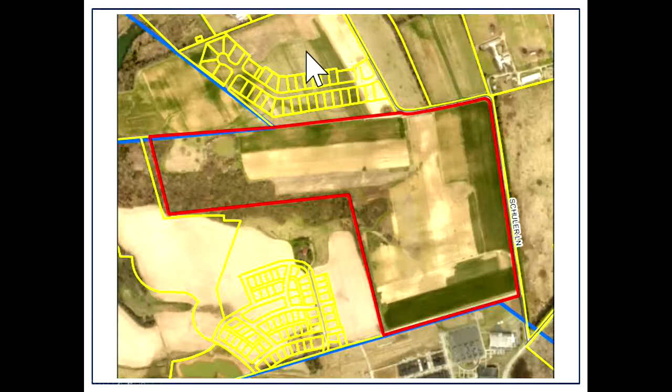This is a zoning map that shows the existing zoning is AG1. To the west is PUD, this is Norton Commons. Again, to the north, R2 is Sanctuary Falls Phase 1, and then to the northeast and east is AG1.

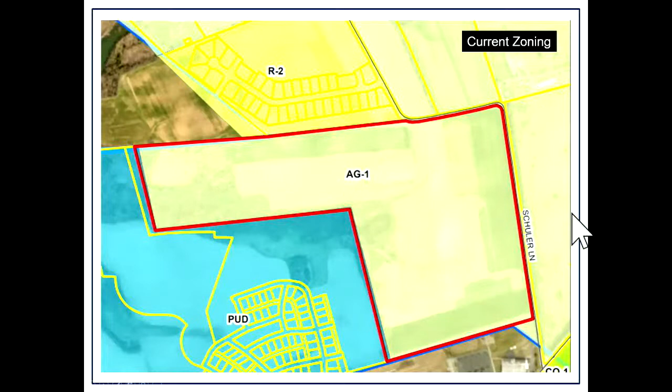The Oldham County Future Land Use Map predicts that the intended use of this property would be for single-family residential.

Site history: on December 19th, 2019, Oldham County Planning Commission recommended approval of a zoning change from AG1 agricultural to R2 residential to Oldham County Fiscal Court. Fiscal Court approved that zoning change on February 18th of 2020.

On December 19th of 2019, the Planning Commission also approved a preliminary subdivision plan for 58 lots on approximately 34 acres. This is the case history.

This originally started back in July of '21 with the neighborhood meeting, followed through with technical review committee, and then we had deferrals from the Planning Commission.

This just shows the postings of the signs, neighborhood meeting notices, adjoining property owner notices, as well as the most recent ones, the APO notices that were mailed on May 5th, as well as the public notice in the Oldham Era.

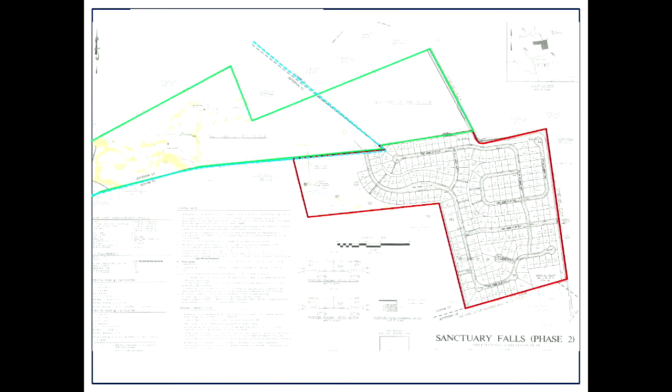Again, the applicant is proposing a zoning change, a zoning map amendment, and preliminary subdivision plan comprised of 187 lots on approximately 109.4 acres to be known as Sanctuary Falls Phase 2. You'll see outlined in red the subject area of the zoning change. This is just a zoomed in version of this proposed subdivision plan and shows the connectivity into Phase 1.

Under notes, R2 allows a maximum density of 3.63 dwelling units per acre with a minimum lot size of 12,000 square feet and a minimum lot width of 80 feet. Open space is not required in the R2 zoning. The proposed density is 1.71 dwelling units per acre and meets the minimum lot width and minimum lot size requirements. The plan also reflects 24.7 acres of open space.

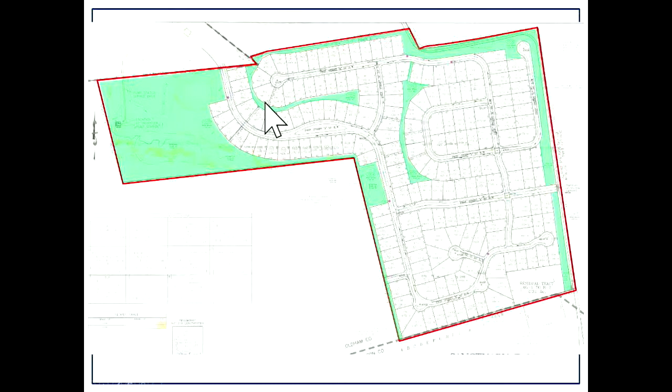Highlighted here in green is all the open space in the development. The plan also outlines a signature entrance similar to Phase 1, an 8-foot mixed-use path along Schuler Lane, as well as a 50-foot landscape buffer along Schuler Lane. This is Schuler Lane here to your east and north. The highlighted in green is the 50-foot landscape buffer, and in pink or purple is the 8-foot mixed use path. They do have a temporary construction entrance here that will also be their signature entrance, similar to what you had seen in Phase 1.

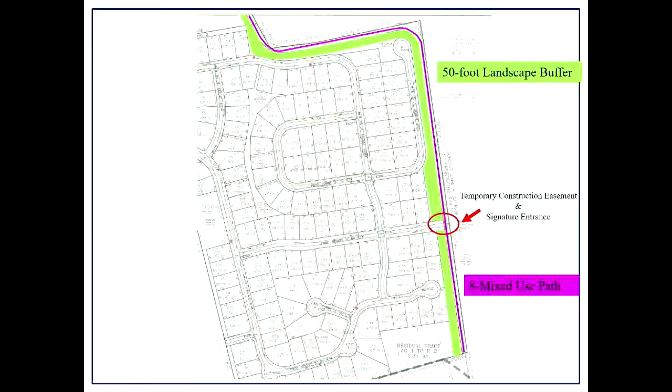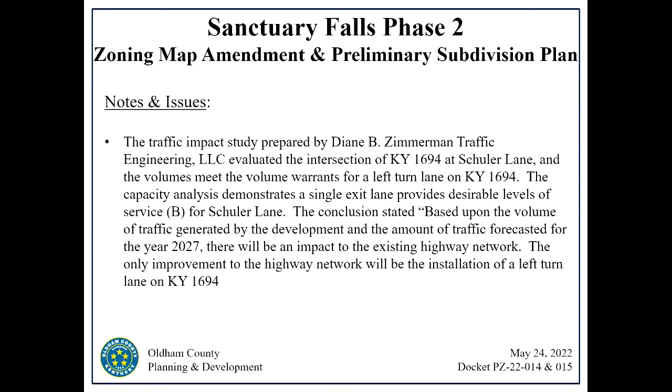A traffic impact study was prepared by Diane B. Zimmerman Traffic Engineering, LLC, and evaluated the intersection of Kentucky 1694 at Schuler Lane, and the volumes meet the warrants for a left turn lane on Kentucky 1694. The capacity analysis demonstrates a single exit lane provides desirable level of service B for Schuler Lane. The conclusion stated, quote, based upon the volume of traffic generated by the development and the amount of traffic forecasted for the year 2027, there will be an impact to the existing highway network. The only improvement to the highway network will be the installation of a left turn lane on Kentucky 1694.

In your packets, they also provided the Kentucky 1694 and Schuler Lane roadway improvement and drainage improvements plan. It outlines a left turn lane from Kentucky 1694 at Schuler Lane. No turn lanes are proposed on Schuler Lane at 1694. This is the roadway plan that you'll see. There is the left turn lane here at the bottom left corner, and then there is the proposed double yellow solid line here.

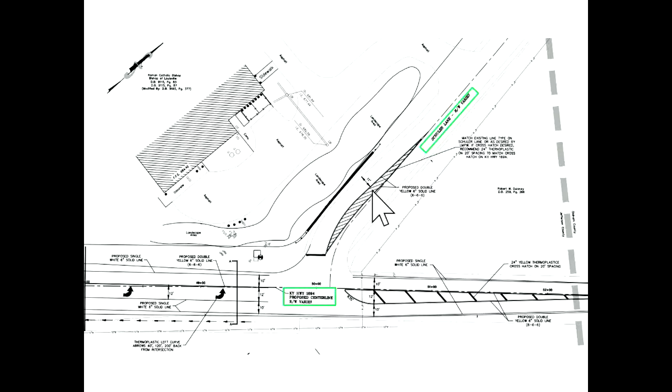The prior binding element for Phase 1 requiring two $125,000 bonds for future traffic control devices at Highway 1694 and Worthington Lane, and Highway 1694 at Stone School Road, have been received by KYTC, and courtesy copies were provided to staff. These are just copies of the two bonds that were posted as required from the previous approval.

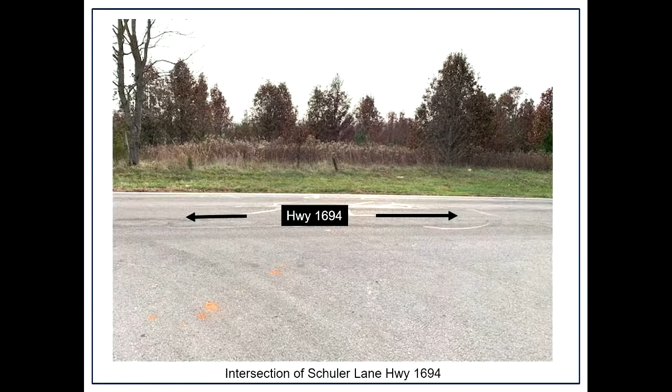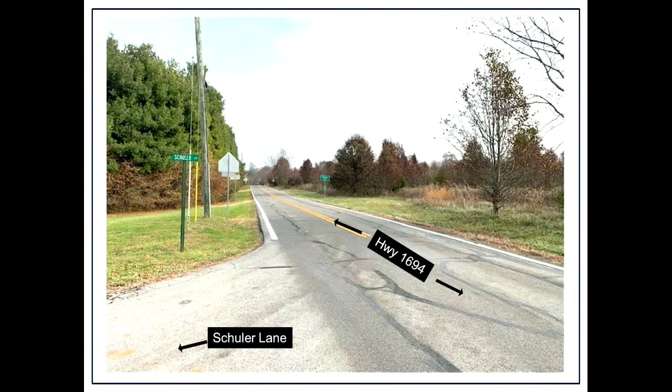This is the intersection of Highway 1694 and Schuler Lane. This is traveling north on Schuler Lane. This is looking into the site. This is just to give you a bearing here. This is the first curve at Schuler Lane. This is Sanctuary Falls Phase 1. You'll see it's already under construction, and this is the beginning of the signature entrance.

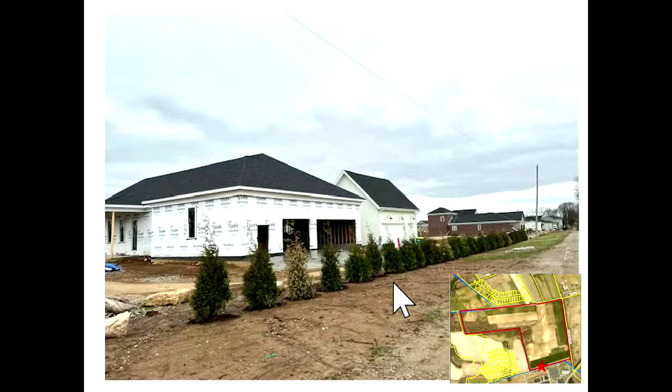This is the east adjoining property, so this is across the street. This is traveling south down Schuler Lane towards Highway 1694. Again, this is your subject site here. Then this is traveling the access road that runs along the subject property and Norton Commons property and the church. So this just gives you a view going down that lane. These are homes in Norton Commons.

Binding elements are the same as before with the exception of the removal of the requirements for the bonds and the roadway improvement plan, which was provided previously. Binding element 1 says approval applies only to the plan presented at the May 24th, 2022 Oldham County Planning Commission public hearing. No lot shall have backyards facing Schuler Lane. The applicant shall submit a landscape plan for approval by planning staff. Prior to recording of the record plat, a 4-board black horse fence shall be built and maintained along Schuler Lane. Before any permit is requested, the developer shall work with Louisville Metro Emergency Service and Oldham County Emergency Management to prevent any issues regarding emergency services dispatch and response, including CAD.

There shall be no exterior construction activity on projects or deliveries to sites between the hours of 8 p.m. and 7 a.m. on weekdays, and 4 p.m. and 9 a.m. on weekends. There shall be no trash or construction debris removal between the hours of 6 p.m. and 8 a.m. I'm not going to read all of the lighting, but this is the exact same lighting standards that were from Phase 1.

Number 9: there should be no subdivision of any lots into a greater number of lots without review by the Oldham County Planning Commission. The cumulative phasing plan shall limit the number of dwelling units to 35 per year, beginning with the first record plat. The preliminary plan must comply with all established federal, state, and county ordinances and requirements at the time of construction plan approval.

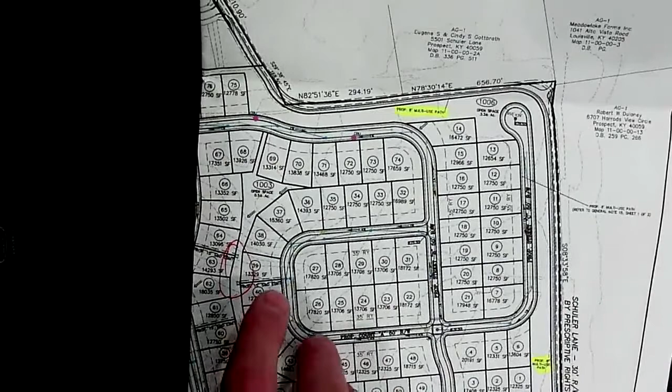Thank you. During construction plan submittal, we want to look at this stormwater connection. It's behind, we'll say it's behind lot 39 and 40, where the stormwater flow from these two pipes creates some acute angles and surface flow. I'm not sure that it's going to stay in the ditch, so we recommend, or would like to see, that piped with catch basins just to eliminate erosion on the adjoining properties.

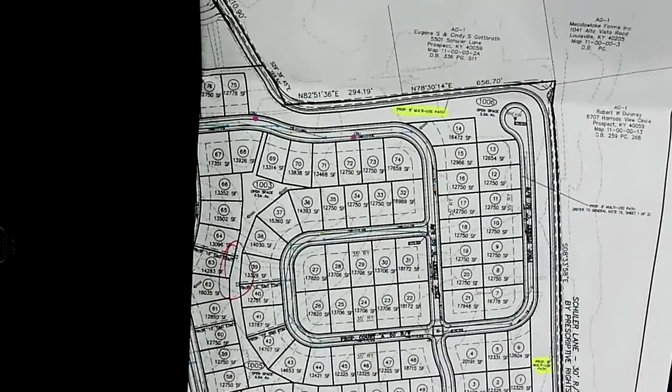With regard to other plan review, the plans shall be designed in accordance with AASHTO, the policy on geometric design of highways and streets, and they can utilize the supplemental low volume roads design guidelines, as we've discussed with engineers in the past, and also the Oldham County subdivision regulations.

We did receive the updated traffic study for phase 2 of the development, which was revised on April 5th, 2022, subsequent to comments from my office, and also 3 supplemental memos, 2 of which addressed some specifics on 2 intersections. We understand that many of the intersections addressed, or really all the intersections addressed in the traffic study, are outside Oldham County - they're either under the Kentucky Transportation Cabinet or Metro Louisville government jurisdiction.

So I contacted both agencies to ensure concurrence from their review. We did receive the permit from KYTC regarding the left turn lane that Amy detailed in her report, and also concurrence from Metro government on the improvements as planned and shown in this development plan. Okay, all right, thank you, sir.

With that, commissioners, do you have any questions for staff at this point? Any questions for the staff?

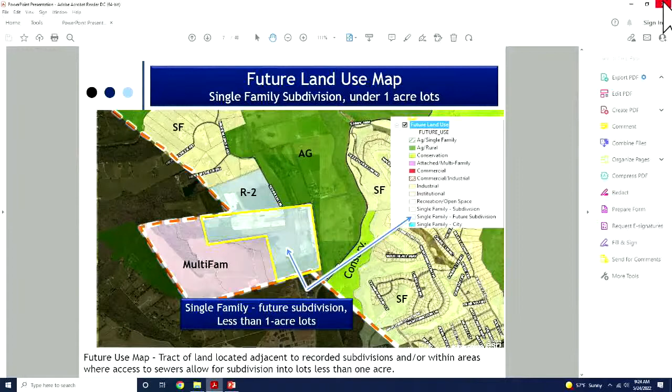As you may recall, some of you were here in 2019 - Elite went well beyond their duties and obligations in providing all sorts of improvements that we'll detail, and they're continuing with that today, well beyond what should be required.

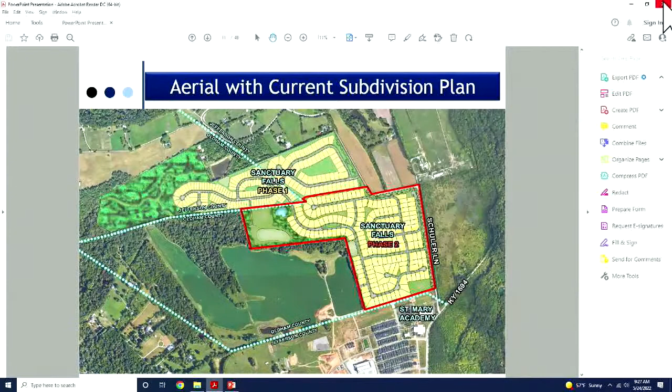It shows our new plan superimposed next to phase 1. This is the plan that we showed in July 2021. What I want to point out as I flip to the next one - you probably can't recognize the changes because they're very subtle. In a second, I'm going to go through and show you exactly what was changed between those two.

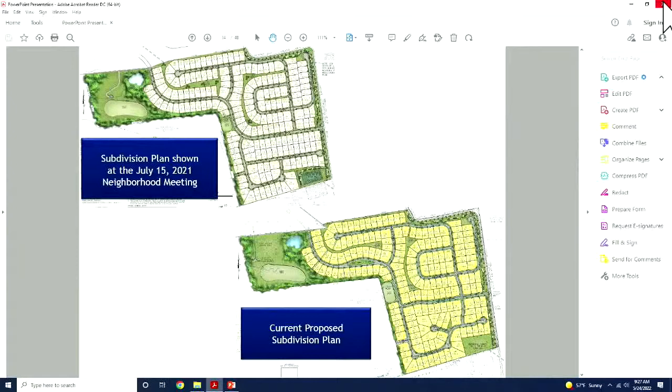And here is our current development plan. I'm going to start at the top right. You can see an open space was relocated - there was a very small sliver of open space between the backs of those homes that's been relocated.

Moving down to the bottom right, we've got a slightly revised lot configuration with our cul-de-sacs. Also, moving clockwise, we've got a revised roadway system. And then moving back to the top left, you can see a grass median was provided - that was absent, that was not part of the plan that was shown in July 2021.

Now, the little box to the left shows really the biggest points. The lot count in the prior plan was 190. With the changes to our road network and the open space configuration, we dropped down to 187 - so we lost 3 lots. The open space remained effectively the same, going from 25.3 to 24.7.

A couple things I'd also like to point out about this plan. On the right, you can see the enhanced landscape buffer and the 50-foot buffer that is along Schuler Lane. You can also see this is the area that will have the 8-foot multi-use path. That was part of what we did in phase 1, and we'll continue that all the way down Schuler Lane.

The last thing you'll notice to the bottom right, you'll see a little green square. That's about 2.5 acres of land that we have dedicated and agreed to provide to St. Mary's for them to use as a play field for their school. That's been a gift from Elite Homes to the school for that purpose. You can also see some of the drainage. We'll have land design and development available to answer any specific questions you all may have about that.

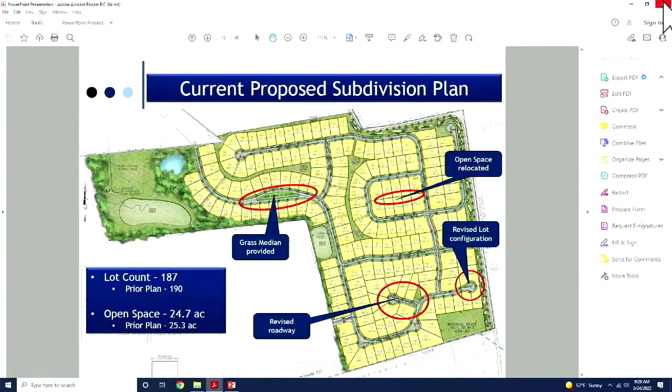Lastly, the housing design standards. Again, we'll have some elevations, and Mr. Pusateri will come up and talk to you about that in detail.

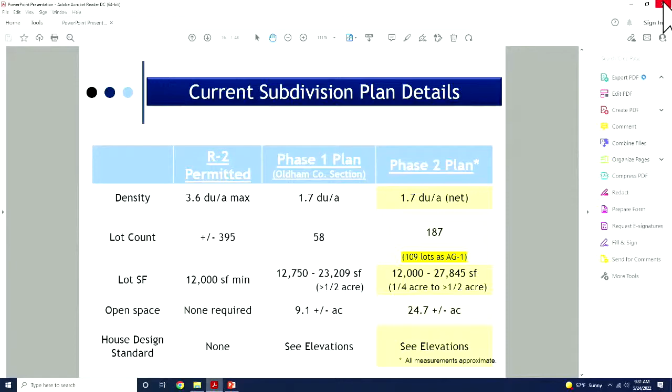One of the things I wanted to raise, because I think it's an important point, under AG1 you're allowed to have residential homes. They just have to be on an acre lot, and they don't have to be on sewers. With the property that we have, by right, you could put 109 lots on this property conceivably. Obviously when you actually plan it, maybe it would be slightly less, but conceivably you could have 109 lots. With our plan, we're only asking for 187. So really not a significant increase, particularly when you consider the conditions and the things that Elite Homes has been contributing to the road network and the conditions that they're doing on this plan, all to satisfy the needed homes that are in Oldham County.

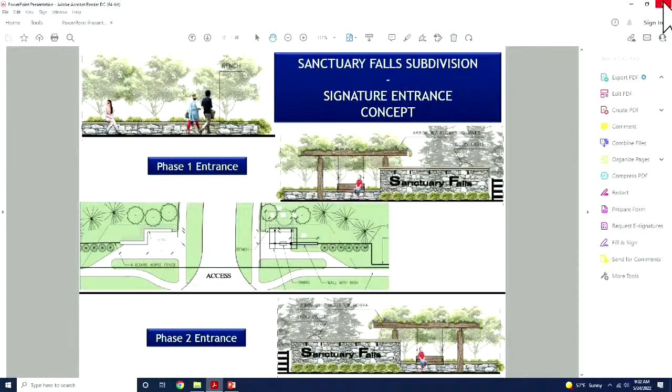This shows our signature entrance. Amy mentioned our entrance - the top one is phase 1, that's currently being built. Phase 2 will be effectively a mirror image of what you have in phase 1. So you'll have 2 bookends. It'll be a very coordinated development and very nice when you drive up Schuler Lane to look at the entrance.

I also wanted to talk about some of our commitments for Schuler Lane improvements. If I could back up, as Ms. Albee mentioned, we agreed to a lot of commitments in phase 1 that we continue to agree to in phase 2. For instance, we agreed to widen Schuler Lane to 22 feet, which was beyond what we needed to do, and we worked with the county in doing so. We agreed to the 8-foot multi-use path, the enhanced landscaping, the 4-board horse fence. We also agreed to 2 bonds for traffic lights at intersections in Jefferson County to assist the traffic issues that are in this area.

One of the things we did is we also agreed at the phase 1 hearing to put a left turn lane in from Schuler Lane onto 1694. And if you look in these plans, if you wrote any notes, there's lots of notes about left turn lanes. So let me give you a little background to make sure we're not getting confused.

The left turn lane that Amy spoke about today, and that we are doing, is the left turn lane from 1694 into Schuler Lane. That is still on the plan and we're still doing it, and it's necessary because of the traffic counts and so forth.

What we had also agreed to do, along with everything we agreed to in phase 1 — I think you can agree we were in a very agreeable mood and agreed to just about everything — a couple of residents asked if we could put a left turn lane

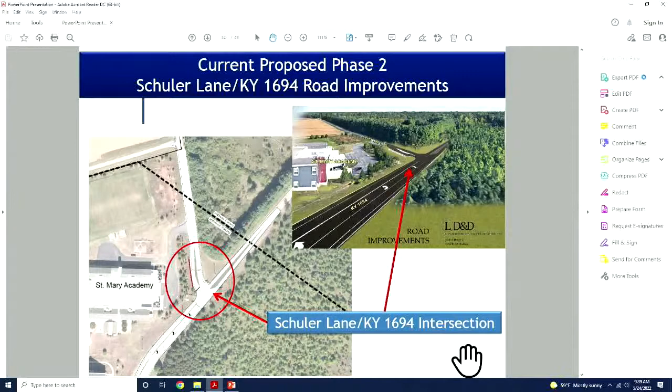So we wanted to do it, and in good faith, we have done everything we can to try to do it. Unfortunately, Norton Commons has a homeowners association. It's my understanding they have not given us the authority to have that additional right-of-way, and they hold ultimate control. It's for reasons unbeknownst to us, but they have not given us that additional right-of-way. Additionally, KYTC and Jefferson County have indicated they don't want the left turn lane. So we've got really two things running against us on that. But again, hopefully you understand and see that it is not necessary.

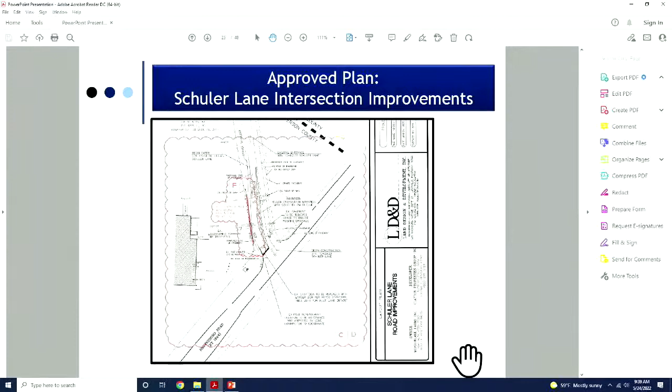Here is our current plan. You can see the crosshatched area, hopefully it shows up a little better than the screen I'm looking at. Again, that is because you can see it's kind of a sharp turn. When you take a right turn for the buses coming down, that's where we're providing that additional radius. And so that's what we're doing, and that's our current plan. The slide shows that it's been approved both by Jefferson County and KYTC, and I believe that also was confirmed by Mr. Silliman. But we have received approval for the current plan as it is today that I've shown.

The next thing I wanted to talk about is the traffic lights. Again, this is for two intersections that are in Jefferson County, not Oldham County. We mentioned the two bonds for traffic lights, and they were $125,000 each, so a total of $250,000 that Elite Homes agreed to do for bonds for traffic lights at Stone School Road and the Worthington Lane intersection at 1694.

With the traffic light, however, with the bonding we provided in phase one, that level of service improves not only over what it would be after build, but over what it is currently if we don't build one single house on this property. It drops to a B at 14.5 seconds.

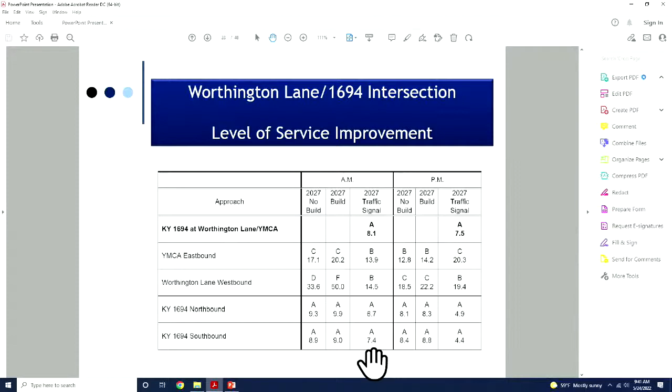The other thing I'd point out is, with no build, all of the intersections are different - you've got C's, D's, and a couple A's that aren't really problematic, B's and C's. But if you compare that to the level of service with the traffic light, all either remain the same or improve in level of service. I believe all actually improve in terms of seconds of wait.

This is the second intersection I mentioned, at Stone School Road. Very similar situation - the only problematic movement is Stone School Road westbound. That is currently an F, so it's in bad condition already, with a wait of 198 seconds in the morning. With the build, it's still bad, still an F at 295 seconds. With the traffic light, however, which has been bonded, it improves significantly from the no-build situation to 26.3 seconds, level of service C.

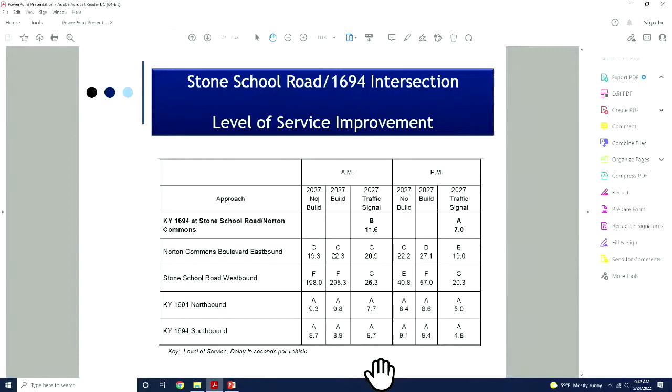You can see a similar fashion in the PM. Without the build, it's an E at 40.8 seconds. With the build, it's 57 seconds, an F. So slight worsening with the build, but with the traffic light, it improves significantly to 20.3 seconds. Again, if you look at all the levels of service with the traffic light, both afternoon and morning, you can see they all improve over the current no-build situation.

Another reason we think this development is appropriate for Oldham County is that it's going to contribute significant tax money to your county. You can see on Sanctuary Falls, we've got our average sales price to date, and these are sale prices from phase one that we currently have, $686,000. Believe it or not, that number has actually gone up since we put those figures in, and I would anticipate by the time we start coming out of the ground with phase two, that price would probably be higher, but we try to be conservative.

The total value created would be $128 million on those 187 lots. And that would contribute $1.658 million. You can see at the bottom in total taxes. A few things, all of them are important, but a few I wanted to point out and I've highlighted.

The school will get directly $738,000 and change. The school building fund will get another $287,000. And the fire department will get $205,000. Significant amount of money that this development will be contributing to your Oldham County. And one thing I didn't highlight is directly to the county, up top, is $111,000. These will all be yearly benefits. This is not a one-time benefit. These are going to be monies that are paid into your county on a yearly basis.

Here I had some binding elements, and Amy really did a detailed job going through them. So I'm going to be very brief, but no rear yards. The four-board horse fence will be done. No additional utility or street lights. We'll have the 8-foot multi-use path.

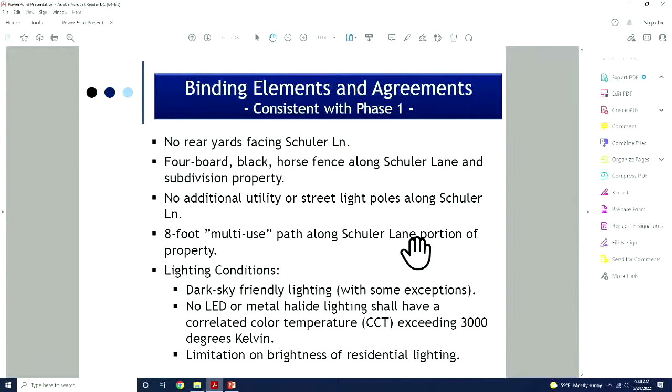Significant lighting conditions. These were very important to the people in Hidden Creek when we came to phase one. I don't believe there's going to be anybody in opposition on those lights. That was something we agreed to do and we continue to do to this day.

At this point, we've got our slides that are going to show our home renderings, and I'd like to introduce Joe Pusateri. He's the founder of Elite Homes, to come take you through and talk about some of the homes. Thank you very much.

My name is Joe Pusateri. I live at 18401 Bridgemore Lane, Louisville, Kentucky, 40245. Before I go over the elevations, I just want to tell you a little bit more about our company. This is our 46th year in business. Very first house I built was in Barwick Farms on Pin Oak Drive. Next home I built was on Winters Lane.

Our company is probably best known for the home we built for the Extreme Makeover Home Edition TV show in 2008 for a young man that was blind and in a wheelchair. It's in the U of L marching band. His father pushed him in formation. His name was Patrick Henry Hughes. And it was big news in Louisville in 2008.

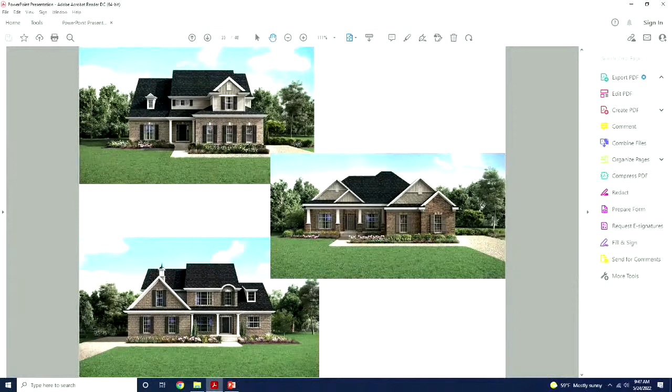Here are some of the houses, some of the front elevations of the houses that we would build. If you look at them, you'll see that they all are predominantly brick and stone with some siding accents. They all will have full basements. They will all have a minimum of 2-car garages. The garages will all be side entry. In homes like this, when you're in the $700,000 price range, the roofs tend to be steeper. So a lot of what you see from the street is the roof.

We have upgraded dimensional shingles as standard on all of the homes. Because we're the builder of all of the houses, we have a master landscape plan for all of the homes. We don't allow a customer to do their own landscaping. We have a professional company so that the homes flow together.

We will plant a street tree approximately every 50 feet. So 10 years from now, as you drive through the subdivision, it's like a boulevard. It provides a lot of shade, a very good feeling as you drive through. And then, of course, you have all the health benefits of planting those trees as well.

We have a design center in our office. Anybody that buys a home from us has to go through the design center, and we control the colors that they're allowed to select, so that people cannot select a color or color scheme that maybe they like, but probably the majority of the neighbors would not like.

We will sod 100% of every lot. That's kind of unusual on lots this size, maybe a quarter or a half acre, to go to that expense to sod the lots, especially the rear yards. But if you seed and straw a yard, it probably takes 10 years of treating it and fertilizing it and staying on it until it ever gets as good as it would be on the very first day that you sod it. So 100% of the lots will be sodded.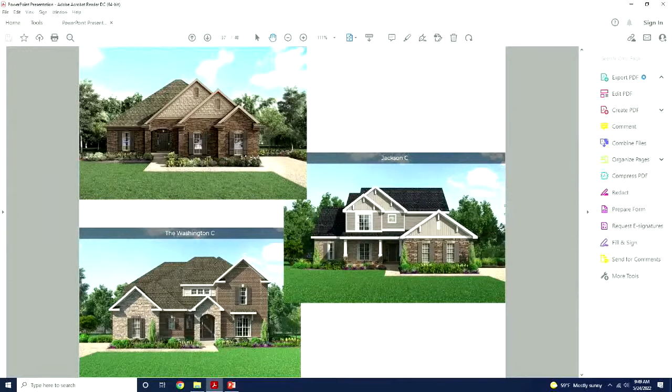If you go through our office, in numerous spots we have our mission statement posted on the wall. At the very bottom of the mission statement, it says: in all of our dealings, we try to do the right thing and to treat others the way we would like to be treated. And I promise you, that is the attitude we have brought to this project.

Anybody that we have dealt with, we've tried to understand what their concerns were, to do what we could to address those concerns and to make sure that this project is better because Elite Homes developed it and built the houses there. And I hope that you will see that and approve what we're asking today.

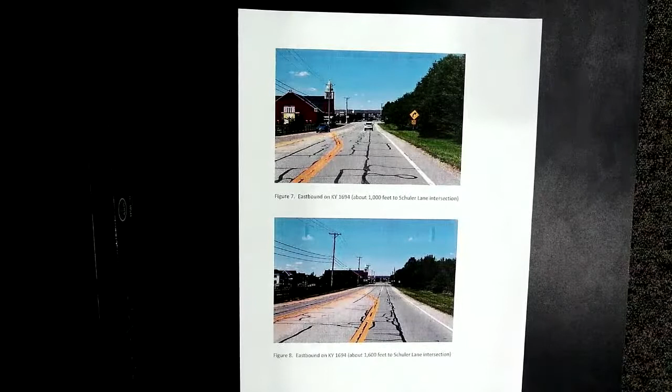If you look at one of the things I looked at in my review, the highway information system—if you go to the Division of Planning website, you can get various information which shows this is a major collector road. It shows the current average daily traffic on 1694 is over 3,000, and it's certainly going to be increased dramatically when this new development starts.

But for that type of roadway, the cross section you're supposed to have is what you've got here going through Norton Commons. You have 12-foot lanes, a 14-foot two-way left turn lane, which could also be marked as a left turn lane at intersections, and a 4-foot paved shoulder. It goes all the way through, up to right past where the school is, and then it starts narrowing down to less than 20 feet between the edge lines.

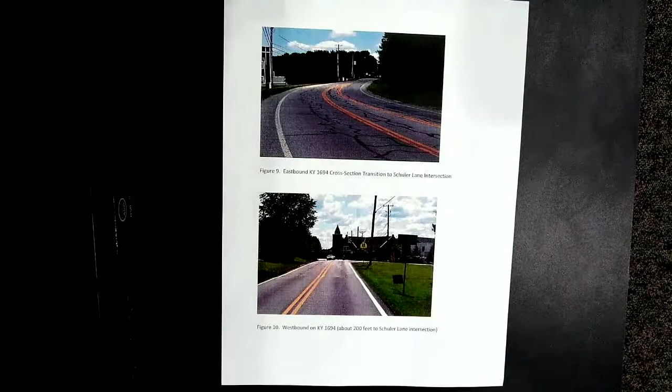This is coming from the other direction to Schuler Lane. That's at 200 feet back. There we have 400 feet back, 600 feet coming the other direction. There is a curve sign in both directions with a 35-mile-an-hour advisory speed.

So that's just kind of a background as far as trying to show the roadway and the issues that we're going to talk about here. The issue I have with it is trying to make the intersection safer. Because, as I said before, you've got an opportunity since you're reconstructing this, to reconstruct it in a way that complies with regulations to make the road safe.

I want to go through—you've got the report, but I don't want you to have to read that whole report. I'll just highlight the data analysis. At the end of what I've got in the report is a little background. I list all the material I reviewed, which I've talked about—the regulations you need to comply with, and the plans.

I did look at the crash history. You can get online and, if you know what you're doing, look at the crash history. There are no crashes at this location at this point in time. It's a very low volume road, which could change in the future—and will change in the future as the volume increases.

But 1694 is classified as a major collector. The most recent ADT, as I mentioned before, is over 3,000. It's going to increase dramatically, substantially, when you open this development. If you look at the crash data, there are no crashes in the past, but again, that could change with the increased traffic flow on Schuler Lane.

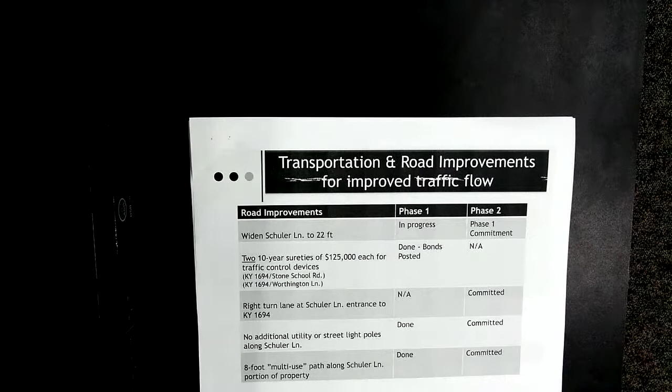So from the perspective of the folks in Norton Commons who went out and built roads from I-71 south to just past St. Bernadette at 12-foot wide, 4-foot shoulders, 14-foot turn lanes, and were required to have 90-degree intersections on all of the roads coming out of their development that access onto 1694 - and then we get to Schuler Lane, and Schuler Lane is going to be 50 degrees. The committed right-hand turn lane is not there. We go from 12-foot lanes to 10-foot lanes. We go from a 14-foot turn lane to a 12-foot lane. Basically, all the commitments about addressing the problems with Schuler Lane have not been addressed. And that was a commitment that was made to this body and to the Fiscal Court when we appeared on phase 1.

So we look at it, and then you throw into the fact that, based upon the report of Ms. Zimmerman as it relates to traffic generated by this subdivision, you're going to generate more cars per day on Schuler Lane than currently exists on 1694. It's going to be about 3,400 cars generated by this development, and there is about 3,200 ADT on 1694 at present, according to the testimony of Mr. Agent and according to Ms. Zimmerman's report. So you've got this intersection that's going to have a huge amount of traffic flow, and that is going to be not addressed.